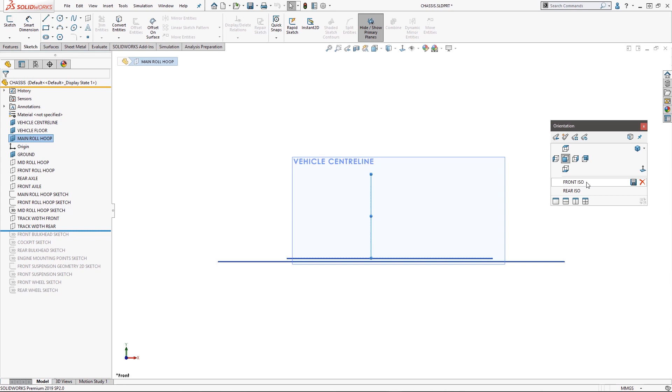The chassis design starts with defining a coordinate system and reference geometry such as planes and axes which help orient the model. It's important to set up a plane for the vehicle's centerline as the chassis is symmetric, as well as for the floor and the primary roll hoop plane.

Additional planes can be created to reference the ground and secondary roll hoops, as these will form hard points in the design.

These planes are made visible, and planes for the front and rear axles defining the wheelbase are also shown. Creating sketches that reference planes allows for flexibility for rapid design adjustments to the wheelbase and structure without requiring lots of rework. We'll show these planes and move on to the roll hoops.

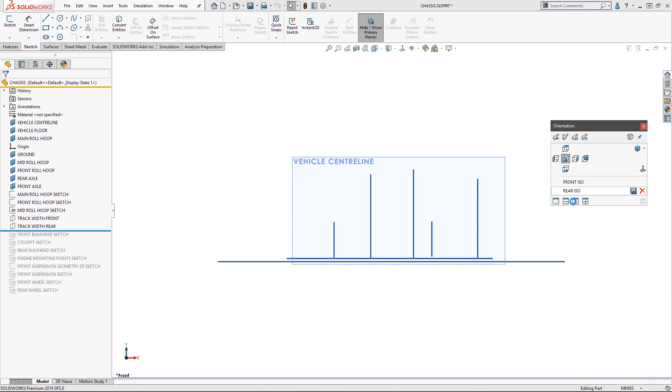Three roll hoops have been created for the main, mid and front protective members, forming the ribbed structure of the chassis cockpit and front bulkhead.

3D sketches are used to curve the sketch in two directions for the front roll hoop. The sketch points are defined according to the Formula Student rules for minimum height, and the two front roll hoops are offset from the ground, creating a step in the chassis profile.

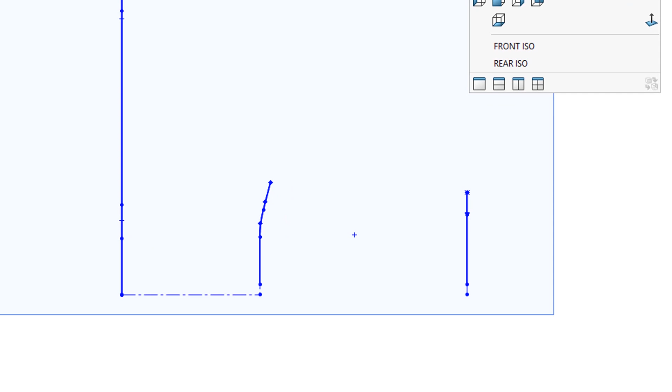To join the roll hoops, another 3D sketch can be created by strategically connecting nodes of one hoop sketch to another hoop sketch in order to create the frame members that make up the front bulkhead.

Let's take a closer look at the front section. Here we can see how nodes have been connected to form an X-brace pattern at the suspension mounting points.

All nodes are connected by three or more points, and where this is not possible, such as on the left-hand side, these will be braced further when the cockpit area is designed, in order to help transfer any frontal impact loads through the chassis of the vehicle in a controlled manner.

At the top, another member helps support and add longitudinal stiffness and form mounting points for the body panels and other equipment.

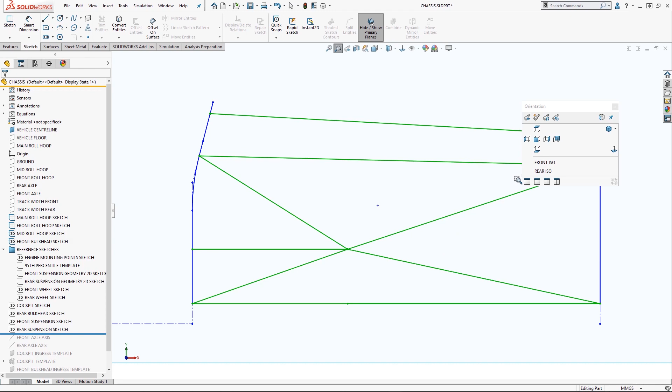A custom isometric view of the front has been created, which will be referenced throughout this design. We see two members that are inset and used to mount the pedal box.

The chassis is symmetrical about the longitudinal direction. In the lateral direction, bracing has been added in the 3D sketch to create members at the lower front suspension points from side to side, forming a suspension box which creates tight integration between the suspension and the chassis frame.

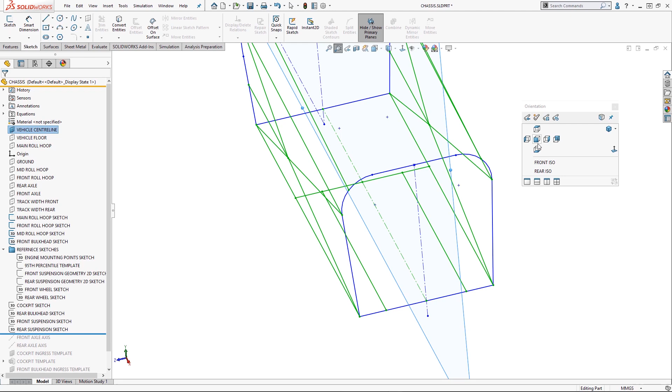A similar process has been followed to design the frame members in the cockpit area. Members have been triangulated around the 95th percentile driver template, also known as PERSI. Let's take a closer look at the model.

The cockpit ergonomics are based around PERSI's inclination position, with a member running parallel to his back. The hip joint is placed as low as possible and the legs extended almost straight for best centre of mass position and comfort.

The hands are also in the position where the steering wheel would mount, necessitating the need to bend the mid-roll hoop. The impact brace conforms to the Formula Student rules and is around 350mm off the ground. We also see a reinforced V-brace that transfers loads to the ground or rear of the structure effectively from the front bulkhead.

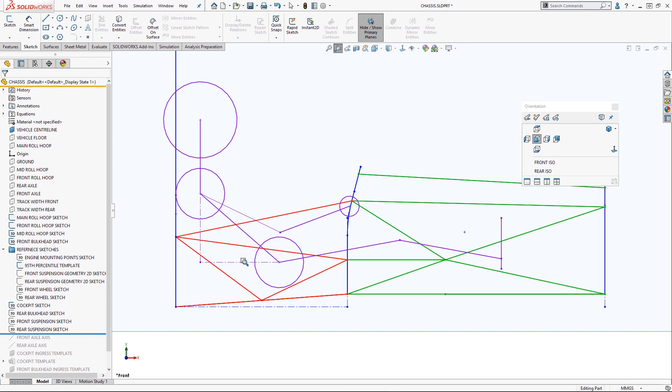The rear bulkhead follows a similar methodology, and we will look at the considerations for building this in more detail. We'll switch over to a rear isometric view, and we can see that half the chassis has been created and is trimmed at the centerline plane.

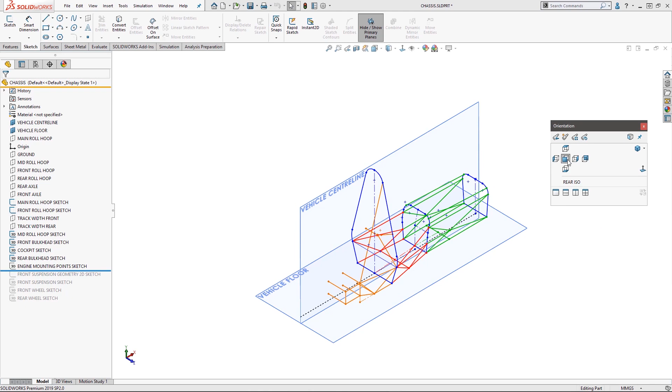A powerful tool when designing using 3D sketches is the ability to mirror 3D entities, saving time and effort and minimizing errors. To do this, we will edit the rear bulkhead sketch and group select from right to left over all the entities in the front view.

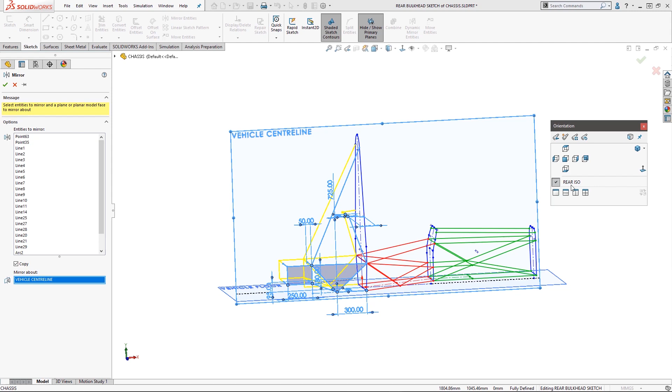We can then navigate to the Mirror Entities option on the sketch toolbar and pick the vehicle centerline plane to copy over. We can then see a preview in the rear iso view and accept the changes to complete the design.

Whilst the operation completes successfully, there are some conflicts and warnings in the end result. This might be something you encounter yourself when designing a model.

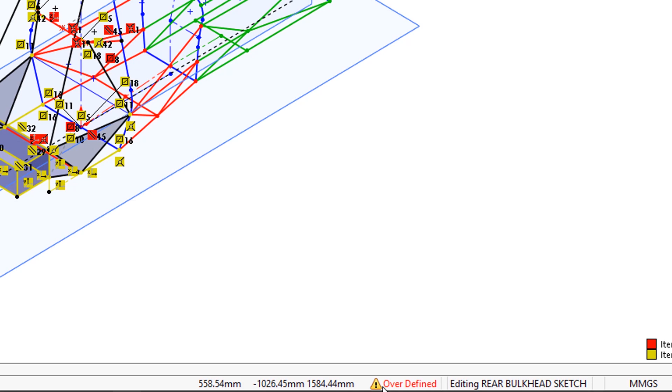However, we can use the Sketch Expert tool in SolidWorks to help us out by clicking the red text in the bottom right corner and diagnosing the problem automatically.

Sketch Expert will run through all conflicts and possible outcomes and provide a number of solutions. In this case, solution 1 highlights that there is a duplicate midpoint which is shared in the center and cannot be mirrored on top of itself.

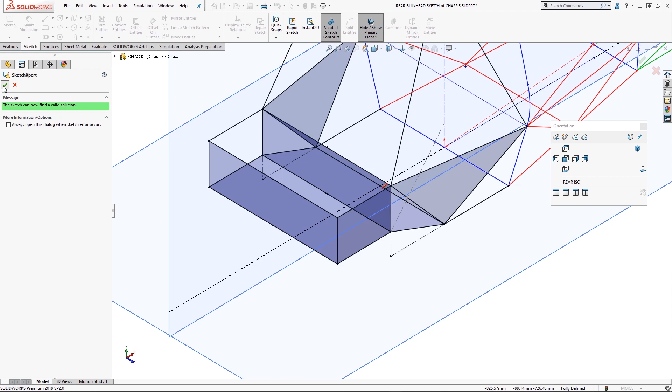Clicking and accepting, we will delete this point and this should resolve the issue. As we can see, this is exactly what happens. We'll now exit the tool and proceed to see the final sketch entities and frame design.

At the rear of this chassis, members have been oriented to create a support cradle that will house the KTM motorbike engine and mount it as a rigid, load-bearing component for added stiffness.

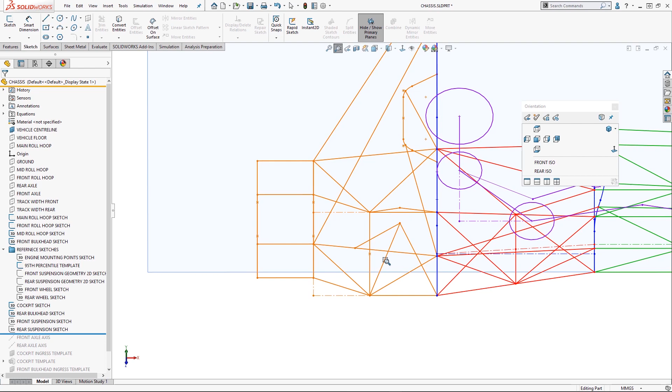Ingress and egress clearances have been considered for the drivetrain brackets and the chain, and the engine itself has members supporting it that are braced from the floor upwards.

Nodal points have been imported using a macro to create the engine mounting points and can be used to design around. Reviewing the design, we can see that the frame structure is mostly complete and braced according to the rules.

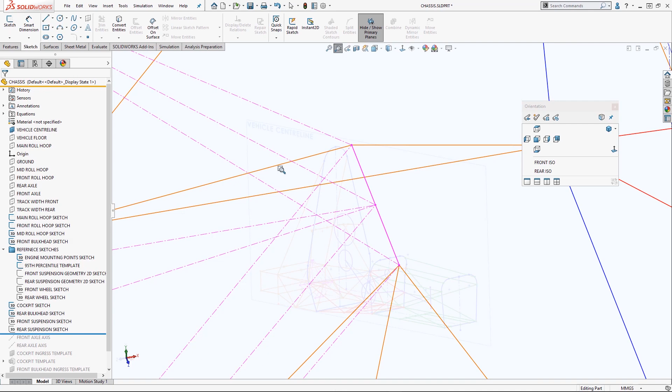We can hide some of the sketches and show the double wishbone suspension sketch. This was created by importing points and linking them to build a wireframe model of the suspension system.

We can see the nodes do not line up exactly with the frame, and this is due to clearance considerations for tube diameters, welding and mounting brackets. However, the points do form a 4-point box that the chassis accommodates and has been designed in accommodation with.

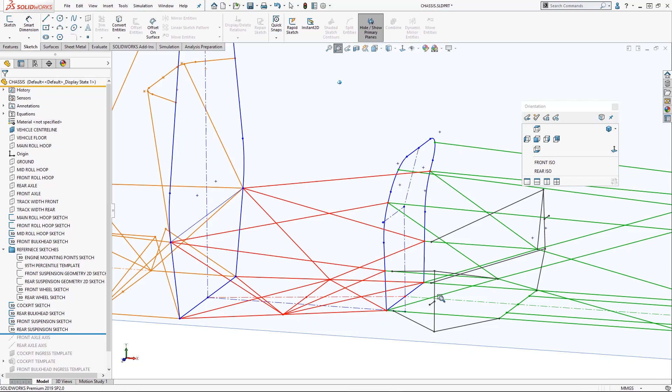This is crucial for any vehicle design, and using planes to base our sketches on allows us to quickly update positional information in a robust manner without breaking the model. Similarly, the rear suspension mounts are close to nodal positions on the rear bulkhead.

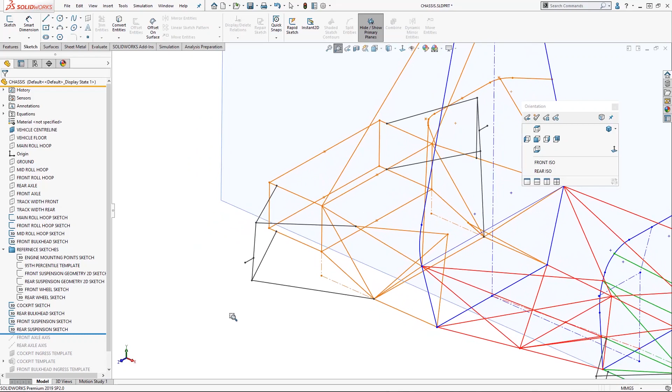Both sketches also include wheel axle locations. The upper wishbone is in line with the member bracing the engine to help transfer loads to the rigid engine block rather than the chassis frame.

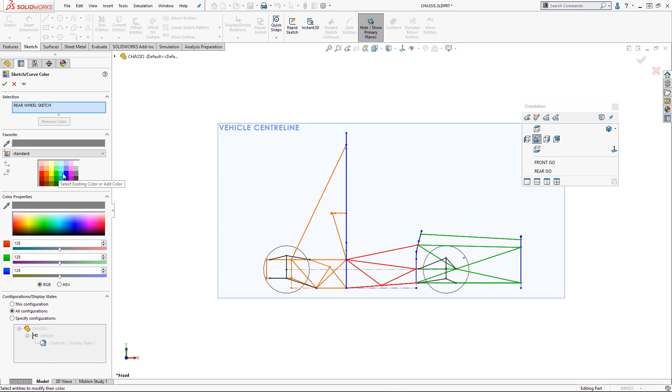Two wheel sketches are included to complete the design and validate clearances later on. A tip to help differentiate multiple sketches is to right-click and assign a sketch color, which is often overlooked but does help.

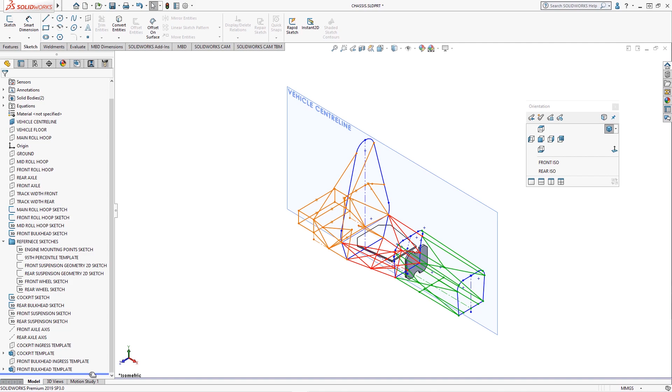Axis reference geometry can also be inserted, and here the two main cockpit ingress template bodies have been modelled and positioned in the respective locations determined by the scrutineering section of the rulebook. Again, this helps validate the design.